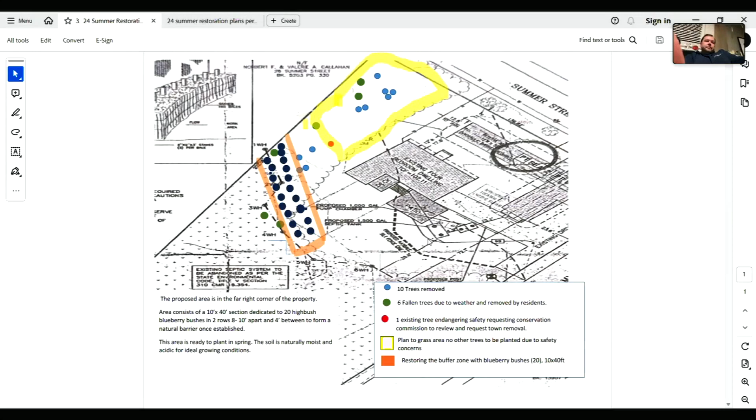Can you see my screen? I can. So I think this is what you proposed by way of a restoration plan. Exactly. And it's also a notice of intent for some new work on the site.

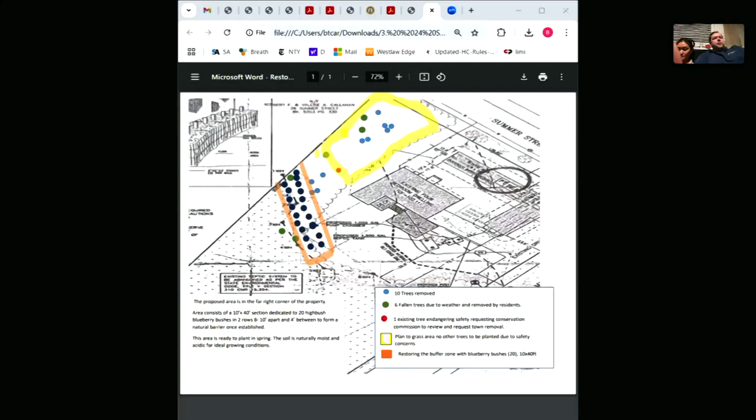I don't think so, as far as new work. You mean the establishment of new lawn area? Yeah, just that side corner. So I have an area that I haven't touched that's basically from the sidewalk, probably about 50 feet in. I just wanted to basically be able to take down and mow that down flat, not even flatten it out per se, but just be able to get rid of the abundance of overgrowth that's there right now.

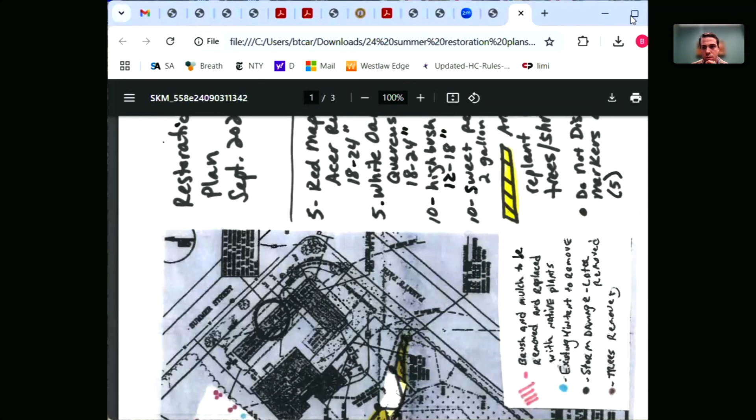You see my screen? I do. So it's my recollection that following the enforcement order, we had a conversation about fixing the enforcement issue, which would have involved planting and not establishing a new lawn area.

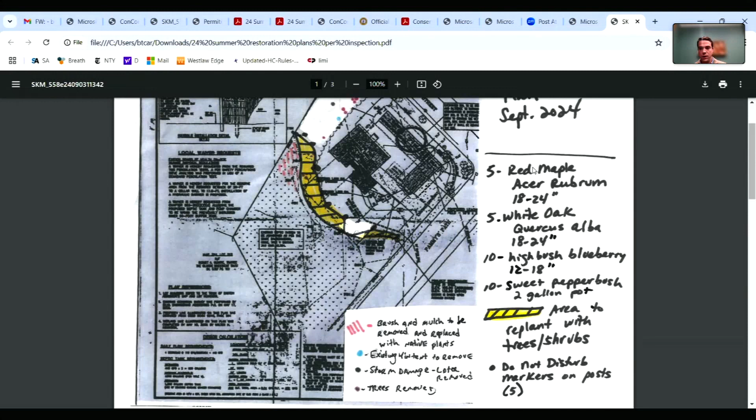And then we talked at a site visit. You wanted a little bit more access to the back of the yard and to have some lawn up by the house. But the original restoration plan contemplated 30 trees. We talked at the last meeting about not wanting to put full-size trees back there, white oaks, red maples. And I think, honestly, that makes sense given the issues you had with trees that were there.

Exactly, yep, understand. So this is what was sort of originally talked about. And then, following our site visit, you guys decided to do a notice of intent to establish some additional lawn area.

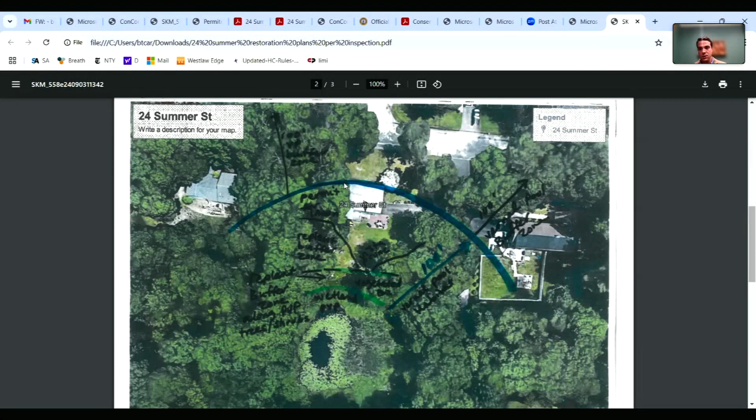Yeah, because basically everything over there is already down, you know what I mean? It's just overgrowth because I haven't touched it since we got the cease and desist last year. Yeah, yeah, I think that's my understanding as well.

So, without having a botanist come out and do a delineation and a survey, we went out and made sort of an on-site plan as to what might make sense as a notice of intent.

We're replanting the buffer zone, which was from the edge of the vernal pool essentially up through this section where trees were removed, sort of coming level to the house, planting across the back here. The thought was there'd be lawn space in exchange for replanting and some extra mitigation.

So where were the lawns? As far as where it says replace buffer zone on that left side, that's basically the area that I was proposing, just more of an expanded zone. It looks like instead of a 10 by 40, you're looking for more like a 20 by 40. Is that right?

On the right side here, I see this established line, but that's already established—there's nothing there. I actually did do a stake around where the vernal pool markings are laid on that septic plan for where they determined the vernal pool to be. That's the dotted line on the proposal, hard to see because I had the marker in there for the 20 trees.

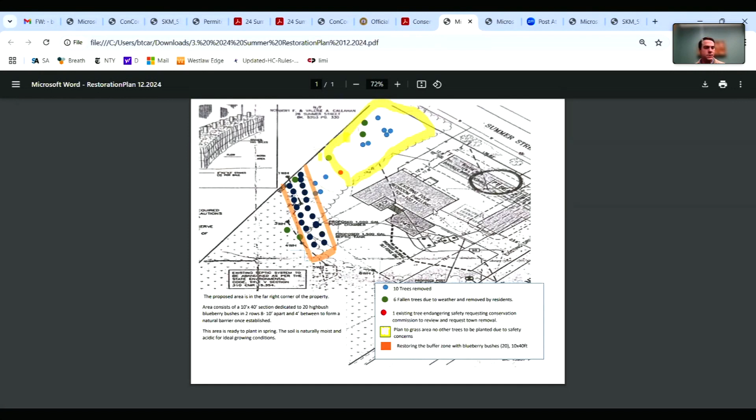Did I get that right, Jennifer? I believe so, but let me just double check. Of course. Yeah, downtown office, January 6th.

Before we do that, any public comment here for 24 Summer Street? All right, seeing none. Motion to continue 24 Summer Street to the January 6th, 2025 meeting of the Easton Conservation Commission. Second. Carol motion, Benson second, roll call vote: Benson, aye. Carol, aye. Rosman, aye.

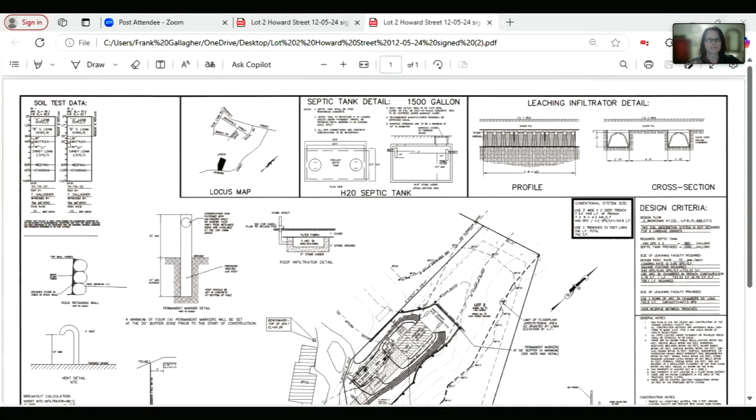Could be it. All right. Great, there it is. Okay.

So the revisions are as follows. The floodplain is listed, and the elevations that go along with it are listed in notes. The 50 and 100-foot buffer zones from that floodplain have been added to the plan. I've added additional markers at the 50-foot buffer zone spaced every 25 feet. I've corrected the detail for the no disturbance signs, and I also added infiltration areas for the stormwater that comes off the roof of the building. So those are the plan changes.

I also submitted separate waiver requests for the two waivers. One is for work within the 50-foot buffer zone—I guess I need a waiver, you tell me—but that's required to put a water service from Howard Street up the existing driveway and into the proposed house. That's an existing driveway.

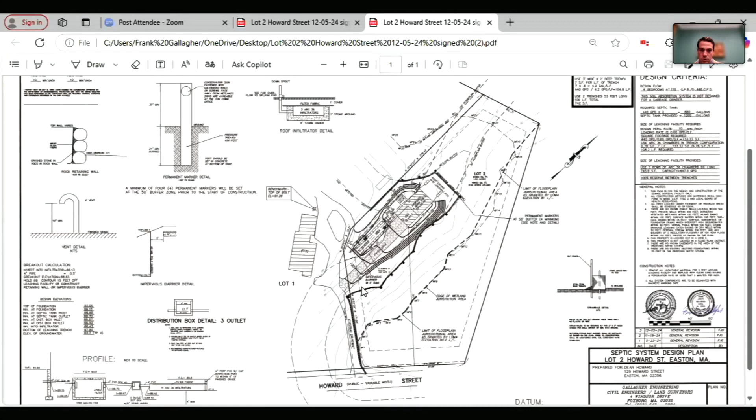I can't see unless you stop sharing. Okay.

There's no public comment. All right, motion to close the public hearing. Second. Carol motion, Vecchio second, roll call vote. Benson, aye. Carol, aye. Rossman, aye. Vecchio, aye. Motion to issue an order of conditions and permit for work for 107 Howard Street, noting the addition of a swale along the driveway, and that revised plans will be in by the end of the week.

Rossman, second. Thank you all very much. Thank you. We still have to vote, Frank. Give us a second. Oh, okay.

Carol motion, Crossman second, roll call vote. Benson, aye. Carol, aye. Rossman, aye. Vecchio, aye.

No, I thank you. Thank you. Happy holidays. Yeah, thanks, same to you.

Good night. Up next is 642 through 644 Turnpike Street, Walnut Tree Corp. Applicant is PMP, notice of intent for the construction of a commercial building and contractor's yard.

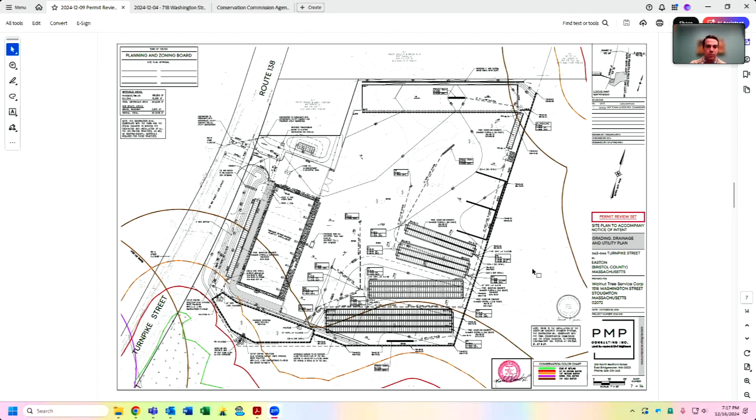I don't have technical questions for you, with the exception of I remember talking about the snow stockpiling area, and there was some concern about the discharge. Could you address that, and perhaps you already have in Eric's comments?

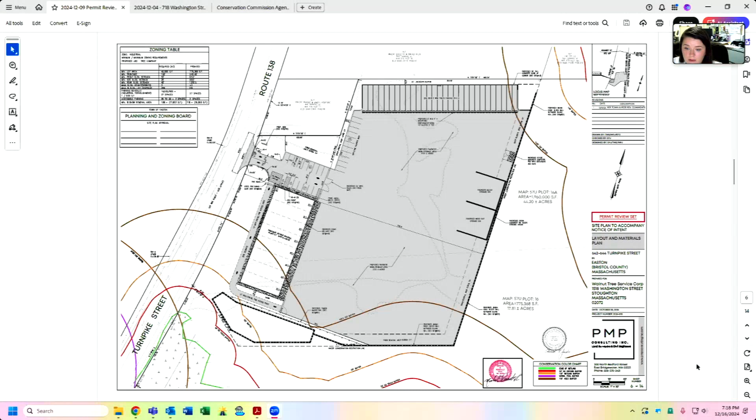Yeah, the snow removal areas, is that what you're asking? So we did previously show a snow removal area abutting this rain garden up front. We did get rid of that on the plan, and we added to this whole rear area here. This whole back area is lined with a wall, so it won't bleed into the Natural Heritage Conservation line, and this area is flexible as well. Obviously, it's a big impervious surface, so there's ample room to move everything to the back here. We did do the calculation, and we're showing about 11% for the snow removal for the site right now.

Jennifer, any further staff comment? Just a request for the draft stormwater pollution prevention plan. That is something we review during the public hearing process, so that is something requested. That's it for me.

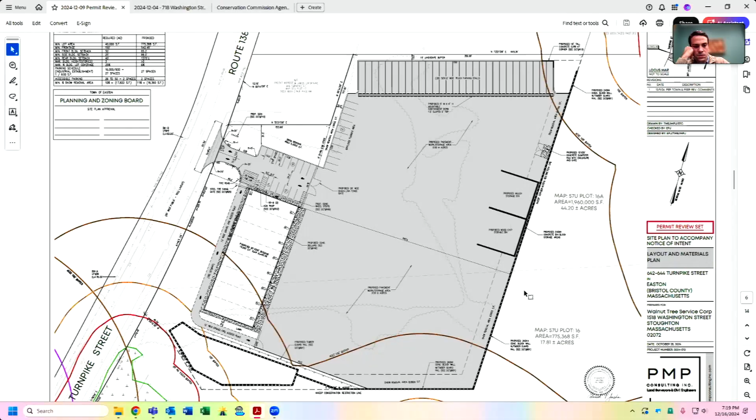Any comments from members of the commission? Any public comment here for 642 through 644 Turnpike Street?

All right, seeing none. So it looks like we're still sort of wading through some peer review, and we're waiting for the letter. So I assume you guys are okay with the continuance?

We have to. If you don't have the letter from Natural Heritage, we're not legally allowed to permit this. Yeah, we need the Natural Heritage letter.

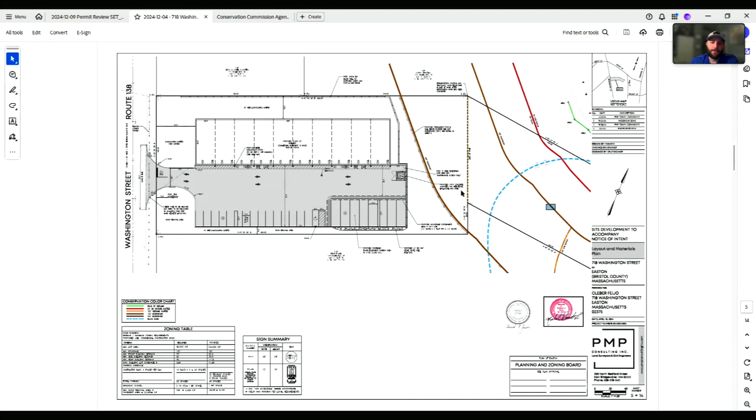Here's our drainage plan, it's a little busy right now. We got rid of the basins in the back, those freestanding walled basins, and put in underground infiltration chambers instead. So everything is underground infiltration at this point, aside from the rain garden in the front. We also relocated the limit of work fence, or permanent post and rail fence, which will have your town's conservation signs on it. That is outside the 200-foot riverfront buffer, and there's nothing proposed within the buffer.

It did help minimize grading in the back here, and the wall will be a little less tall than previously proposed. So we are waiting on John, but we believe we addressed all of John's and Jennifer's comments. I think Mike wanted to touch on something regarding the drainage system, but other than that, I'll be happy to answer questions.

Some of the concerns John had was the need for a formal sediment forebay instead of vegetated treatment for the rain garden, so we've put that forebay in up front.

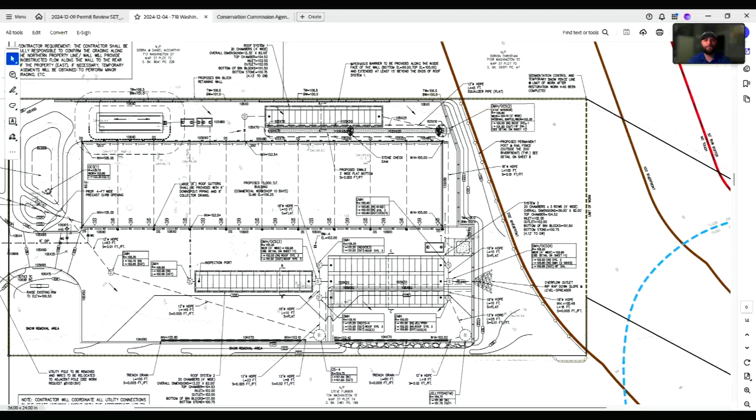Nope. All right, Samantha, Michael, I assume you'd like to continue this to the next meeting? Well, we would like to, but we're going to ask. All right, motion to continue this to the next Conservation Commission meeting on January 6th.

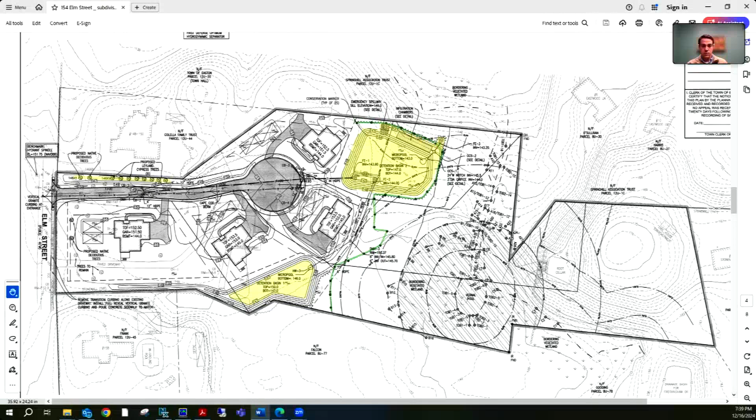Yeah, those were the main issues that were sort of whittled down to now. Moving along, getting there. Yeah, I think, Jennifer, that addressed basically every question that I had as well. Any members of the commission have further questions or comments regarding 154 and 154R Elm Street? Any members of the public here with comments for 154 and 154R Elm Street?

So, Claire, while we're working through peer review and waiting on some information regarding the need for easements, we're going to continue this. Our next meeting is January 6th. Does that seem reasonable to have you back, or do you want more time? That's reasonable for now, and I'll be in touch with Jen if we need to request a continuance.

That makes sense. All right. Motion to continue 154 and 154R Elm Street to the January 6th, 2025 meeting of the Easton Conservation Commission. Vecchio second. Carol motion, Vecchio second, roll call vote. Benson, aye. Carol, aye. Crossman, aye. Vecchio, aye.

Thank you all for your time. Happy holidays, and see you next year. See you next year. All right, take care. I think I might have said January 2024 on a couple of the earlier ones. Hopefully they don't get a time machine and come back.

Good, up next is 51 Rockland Street, which is an ANRAD. This applicant has requested a continuance to the next meeting. Is there anyone here to talk to us about that? No, we have ECAT and Melissa left in the audience, so.

Fair enough. So motion to continue 51 Rockland Street to the January 6th, 2025 meeting of the Easton Conservation Commission. Crossman, second. Carol motion, Crossman second, roll call vote. Benson, aye. Carol, aye. Crossman, aye. Vecchio, aye.